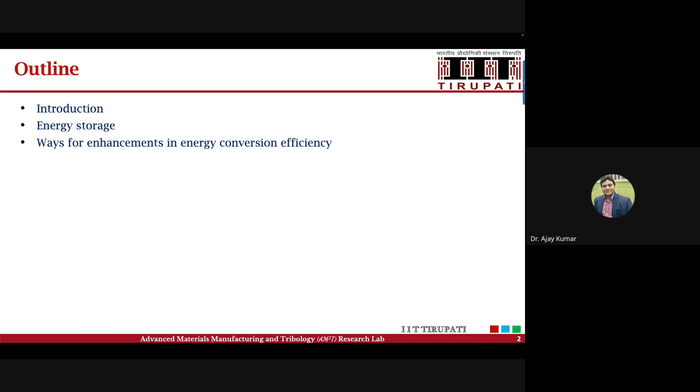The outline of the talk: I will give a brief introduction, then discuss the energy storage systems, and then ways for enhancement in energy conversion efficiency. So to keep you briefed on this, let's talk about energy storage and conversion systems.

All of you are aware of the importance of energy generation, because if you see any country like India, we are the largest population country, and the demand for energy generation and implementation is also increasing day by day. So we have two reasons to understand the importance of this energy generation. One reason is the population growth of any country, and the urbanization which is happening every day.

People are migrating from small places to the cities, and you can see this population migration. When people come from one place to another, they have to meet certain requirements in terms of energy and their needs. That is why fulfilling the energy needs of the people is important. Now, the second thing is that for this energy requirement, we have various resources to get this energy.

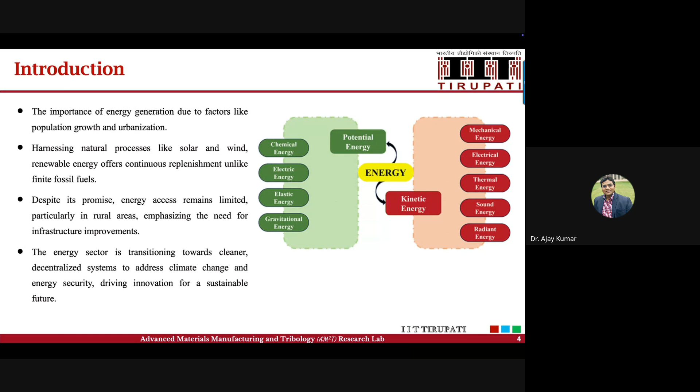What you need to understand is the predominant concern today in daily life revolves around energy production and optimization in its utilization. That is why energy storage systems have emerged.

Now what you need to understand is energy utilization underpins the functioning of the world, with energy being the capacity of a system to accomplish work. That is why the energy storage system is going to play an important role - how we can store the energy in an efficient manner and then utilize it for accomplishing any work.

Now most of you will be aware about the law of conservation of energy, which says that the total energy content of the universe remains unchanged. So that is the law of conservation of energy. You also know that this energy is immutable - it can undergo conversion or transfer in various forms, but it cannot be created nor destroyed.

This is the fundamental law of conservation of energy. This energy is immutable - it goes through conversion and transfer between various forms, but it cannot be created or destroyed. So this is the law of conservation of energy.

Ajay asked: is the slide only on slide number 5, or are the slides changing? Because we are seeing slide number 5. Okay, one minute, let me see. So you can't see the slide changes. It was there at slide number 5 for a long time, talking about kinetic, potential. Okay, let me see what the problem is. Now it is visible, wait a minute. Now it is visible, yes. Okay, so how much have I covered, Dr. Binayak? You can just recollect, I will continue. It was stuck at only one slide, so we were a little confused. No problem.

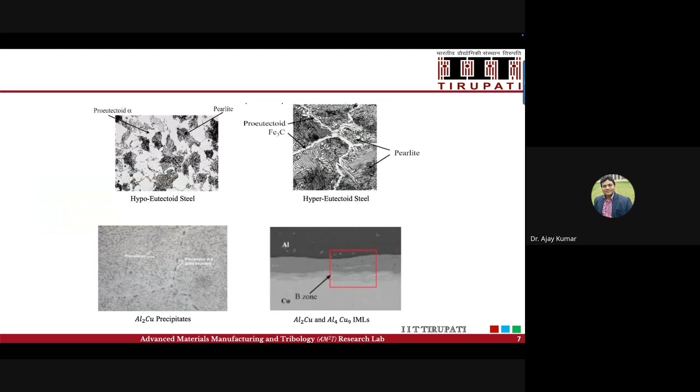So basically, I am trying to explain the energy conversion mechanisms, and taking some examples. This is the slide where I was talking. Any question if anybody is having, they can ask. Can you change the slides again, back and forth, so we can see? So I have other slides to show here, because you can see the content I was actually covering and explaining.

Then I'm going to discuss the energy distribution system. So now I've discussed the conversion mechanisms. Shall I continue? Yes, we can continue.

So I was discussing about what do you call... one minute, I will just... Dr. Binayak, can I take just a 5 minute break? Yes, I will just drink some water. Okay, yes please, I will just take a 5 minute break. I will come back.

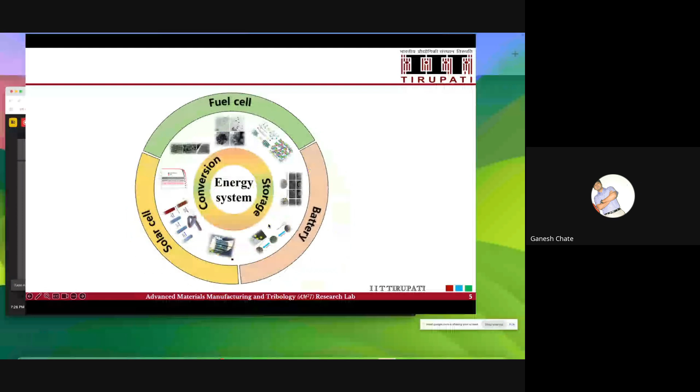Hello, Ajay. Yes, I did. Okay, everyone is here. So I'll just go through it.

So, any doubt or any question till now? I have discussed the different types of energy sources and conversion mechanisms. Any doubt till now, or should we continue? We'll continue, Ajay, since it is the topic.

The title of the talk is energy conversion and storage. It is a very vast topic. So what I am discussing at the very beginning, I will now discuss some of the mechanisms, and then I will also discuss the different types of energy storage materials for different applications.

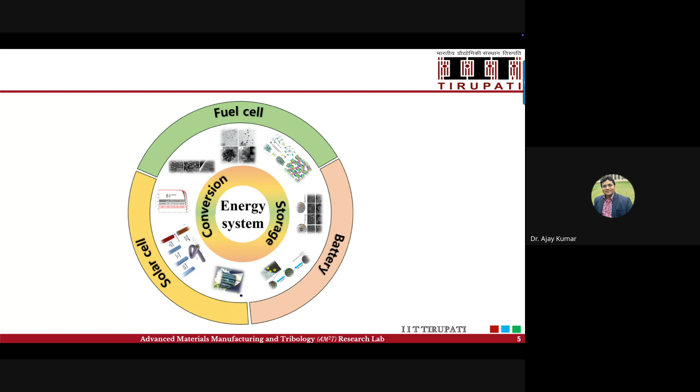But one problem with hydrogen storage material is hydrogen embrittlement. How many of you are aware about hydrogen embrittlement? When it comes to hydrogen storage materials, one has to understand this. Hydrogen is the smallest atom.

So when hydrogen comes in contact with any other material, it goes and sits near the atomic sites in the material, and then creates a type of defect locally, for example on the grain boundaries. It generates a lot of defects, and this is known as hydrogen embrittlement. Once hydrogen embrittlement starts inside the material, a crack will start from that location, and finally you will have failure of your component because of this problem.

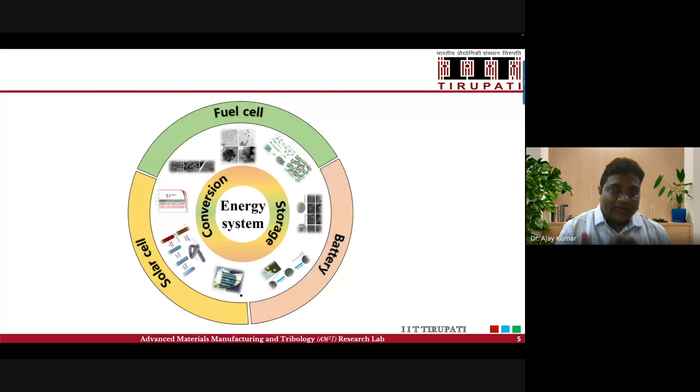So once it degrades, the same material used for hydrogen transportation means the hydrogen will directly come in contact with the pipeline material. So now we have to come up with a mechanism - whether we can develop a coating or a material we can use in the existing pipeline, because the pipeline now being used for hydrogen storage or transportation, we cannot replace the entire pipeline.

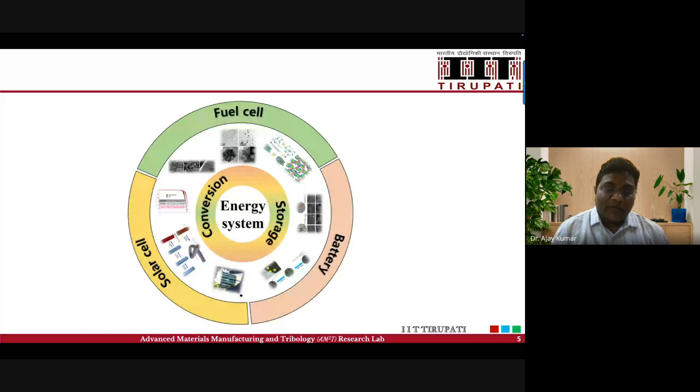So we have to come up with a material coating or an advanced material which can avoid this problem. I'll give you an example where our team is developing some of these materials.

We are developing some types of coatings, you can say claddings - coating or cladding are the same depending on the thickness of the material. What we have developed is a reverse cladding or reverse coating technique. If you take the example of the conventional coating or cladding technique, you have a substrate material, and then you have the material which has to be coated or cladded onto it. This is the conventional way of coating.

If you reverse this process, it will be known as reverse cladding. So we have come up with that reverse cladding or reverse coating technique, and we have demonstrated that these claddings can be done on steel pipeline materials, and that can be used to avoid the hydrogen embrittlement problems.

Now in these pipelines, when we are using the entire pipeline as steel material, it is also having a lot of weight, and when you install these pipelines it requires a lot of manual power and other things to install. So can we do the light weighting of this material, and at the same time come up with a mechanism to avoid the hydrogen embrittlement problems?

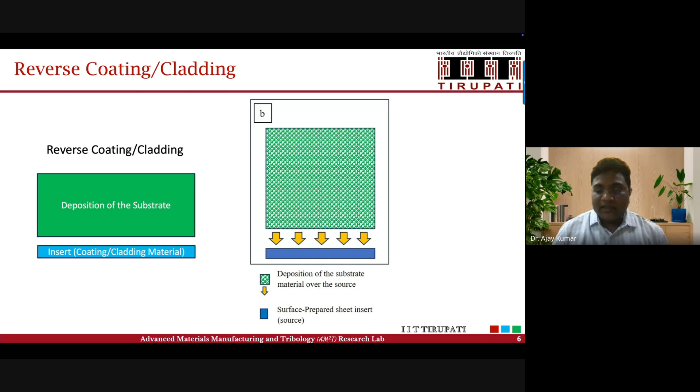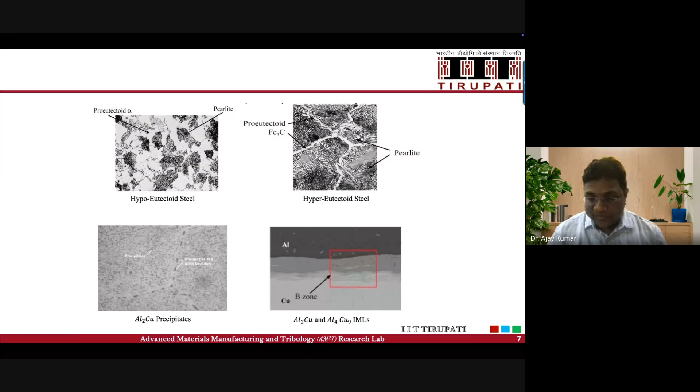So we have developed these technologies, and some of these cladding methods for hydrogen. The existing methods are there - you must be knowing different types of cladding processes. Even some type of welding processes are also used in developing the coatings. But in the welding process, you must be knowing that when we are doing the welding, we are having the heat source, and we are having the material which is localized in the molten phase.

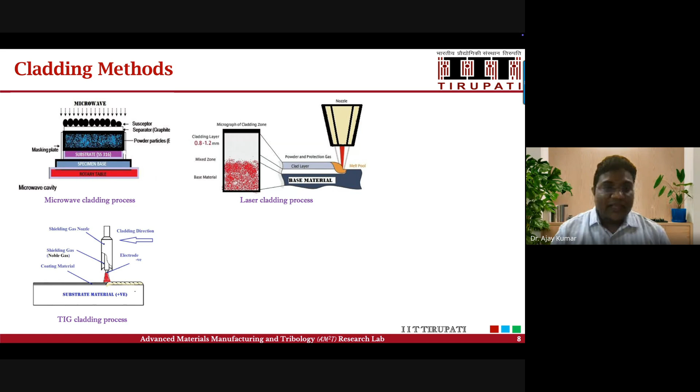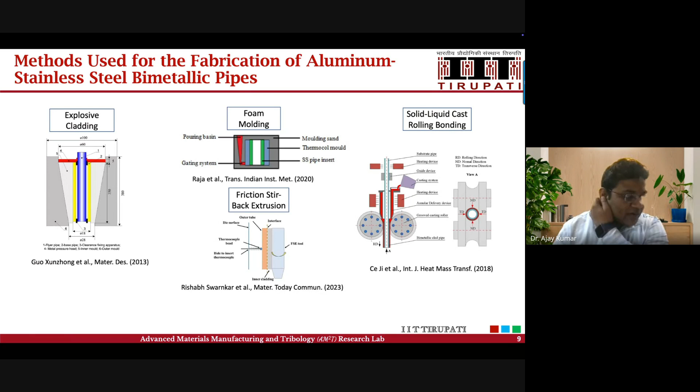So if any defect is there in these claddings... there are several techniques now to develop these cladding techniques for hydrogen storage materials as well as for hydrogen transportation. So I'm just showing you some of the things, and how.

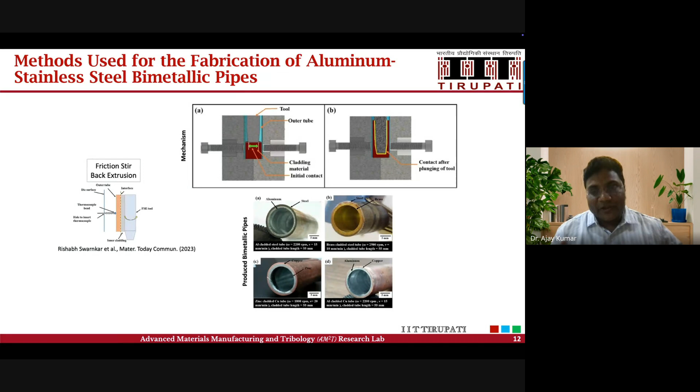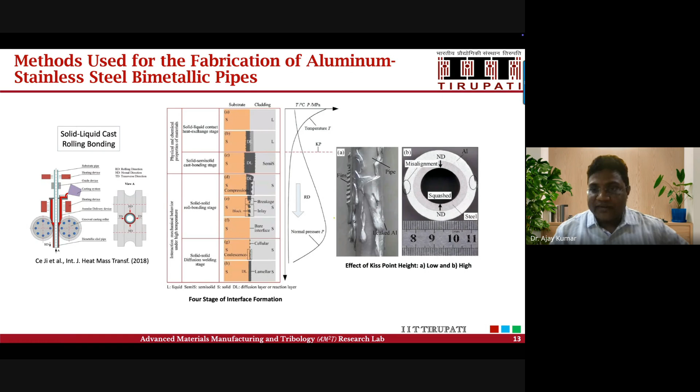These are the examples you can see here, examples of the pipes, and they are used for hydrogen transportation. The techniques are many, but at the same time you have to make it economical as well as energy efficient. And then what you have to do is play at the interface so that when it comes into hydrogen contact, it should be embrittlement resistant.

I'm giving you some examples where we are contributing our research in some of these directions, where these materials are being used for hydrogen transportation. So we are developing these pipes for hydrogen transportation. Even the same material can be used for hydrogen storage.

Here you can see we have developed these prototypes in the lab itself. So inside you can see.

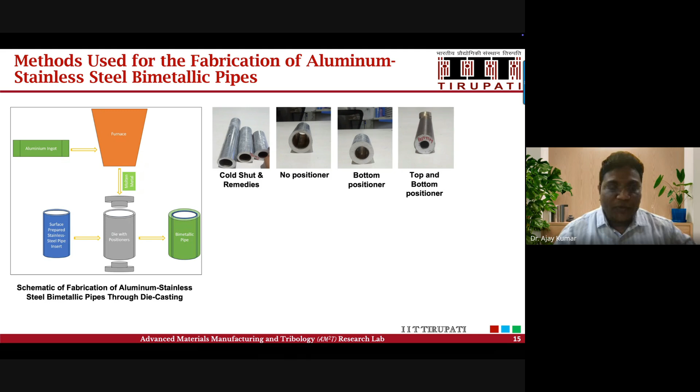And the concept is very simple: we are using the casting process, because when you make these pipes, the industry has to adopt this process. It is an industry accepted process. Generally die casting is used for these pipes and these materials, and we have demonstrated the same in our lab, and now we have developed these prototypes. So it is a well accepted process, and at the same time we are fulfilling the requirement.

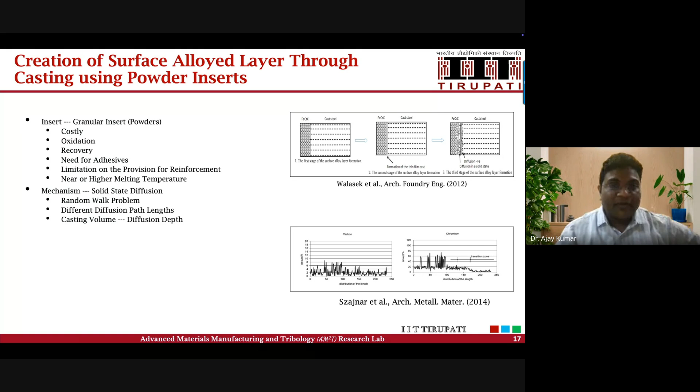Of hydrogen transportation as well as hydrogen storage. So this is the concept I want to show you.

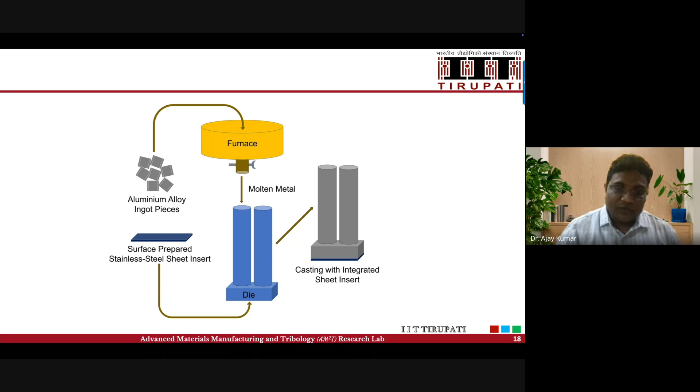We have the die and we have the molten metal, and here what we do is we put the stainless steel inserts. This stainless steel of different grades we can use depending on the application. Generally austenitic stainless steel is used to avoid hydrogen embrittlement problems. So this is the concept here.

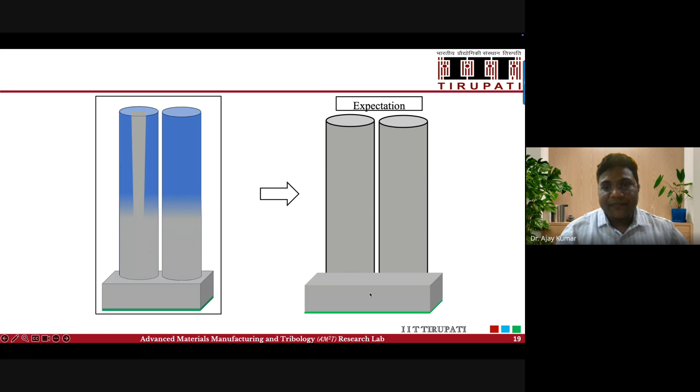So you can see here, I want to show you — it shows this. Okay, so this is the animation of the entire process, which goes here, and so we get this cladding over the substrate here. So when we were doing the experiments in the lab, we have faced a lot of challenges during the process.

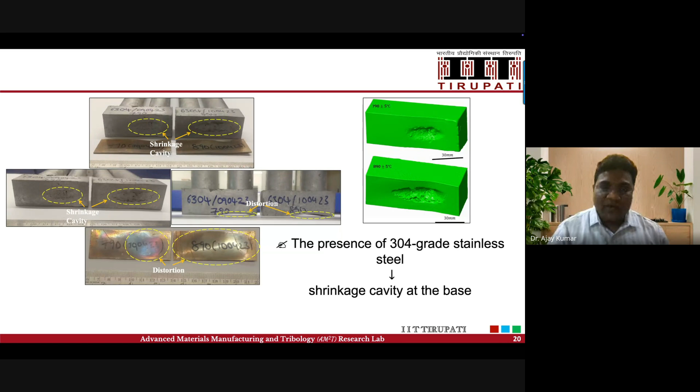But through our understanding of the entire work, we have now eliminated all these defects and all these things. So you can see here we have developed these claddings over this aluminum.

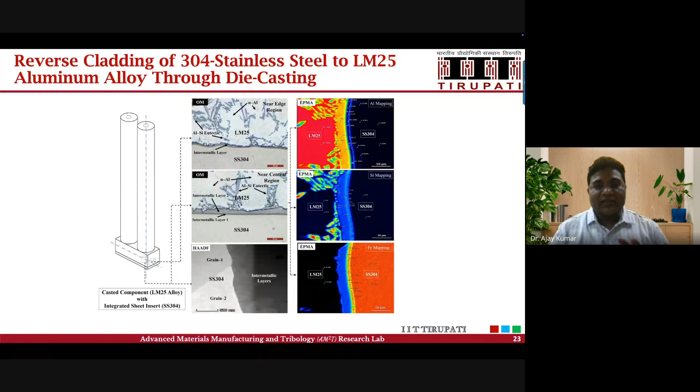The interface, you can see here in this transmission electron micrograph, shows the intermetallic layer, and then you have one grain, another grain, at the nanometer scale. There is no defect at this nanometer scale, which shows that the interface is defect free, and it will serve the purpose for which it is manufactured. You can see this is the bigger picture here.

We have published this work, and now we are making the prototype, and testing these materials on hydrogen storage devices, as well as for pipelines for hydrogen transportation, along with natural gas pipelines.

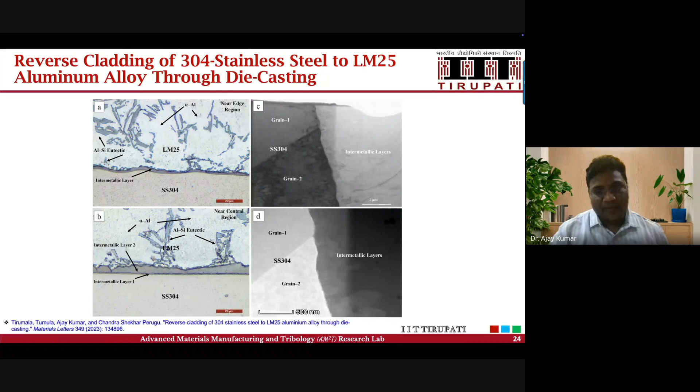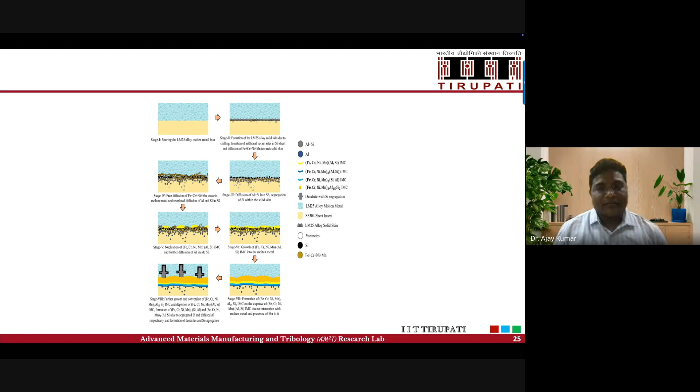So this is the device, and we have developed the mechanisms, we have proposed these mechanisms. Basically it is diffusion happening, but you have to control the entire process. So we are developing these things.

You can see this is a better view. So you will ask the question, okay, you are making the pipe for these applications, and internal cladding is there. But you also need to ask whether this internal cladding has any interfacial defect throughout the cross section.

So these are the things which I would like to present as one application. I have given you the overview of the different energy systems, energy flow systems, and energy storage materials. And then I have given you one case study where we are developing the material for hydrogen storage and hydrogen transportation devices for pipelines.

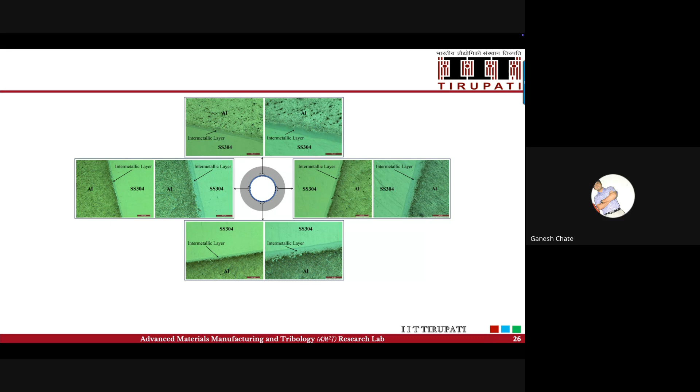Now I request, if anyone has a question regarding this, feel free to ask. I request participants, if any questions are there with respect to battery technology, materials that go into batteries, functionally graded materials covered till now, they can ask. Because this topic is very vast, there are so many things to cover, and time is limited. But if you have any question, or if you don't have any question later on, you can write to me or to Vinayak ji, we can do that. We can do a separate discussion as well.